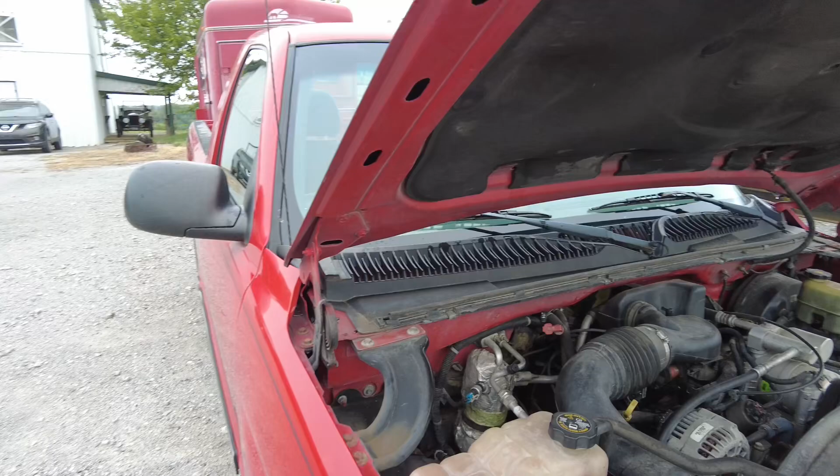So here's this pickup truck. It's got a V6 engine in it, and let's try to open it up. My dad broke it on the front. Yeah, I let him borrow my truck, and then he brought it back all beat up, but it was still working until now. So I have every reason to believe that either the coil or this ignition unit failed on it. I just changed the coil not too long ago, so we'll probably try to see if the ignition

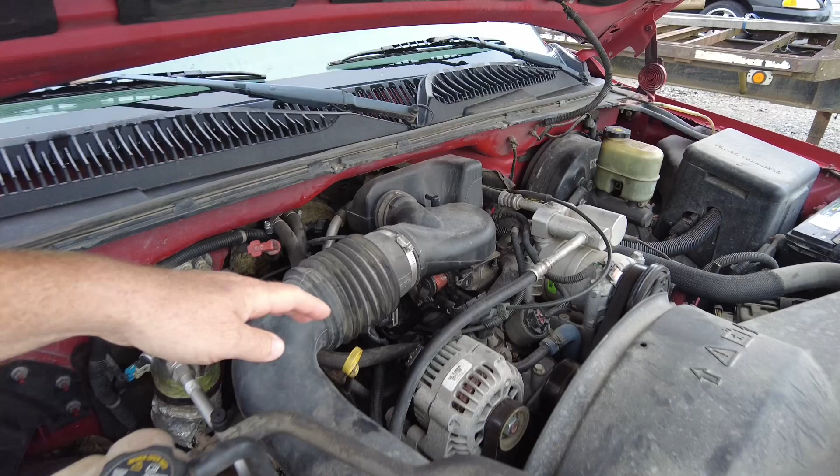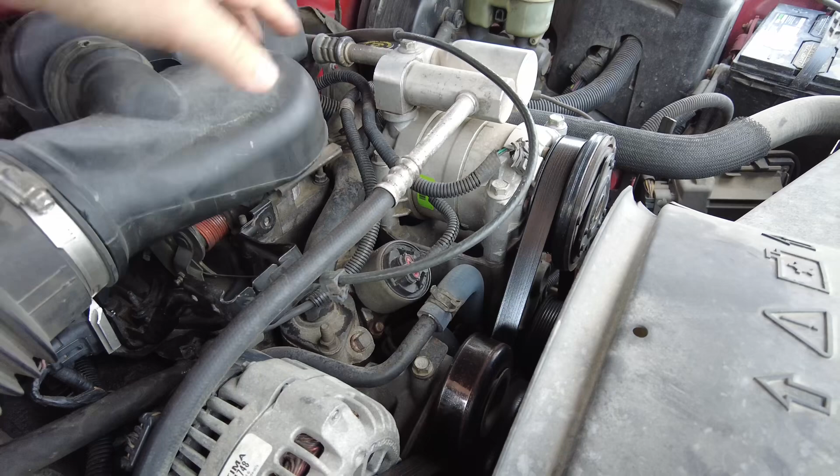part broke. So first we're gonna remove this big hose here. Actually I'm probably just gonna take this off and then remove that, and then we can get access to the ignition, which is right under here. Once you take this plastic screw off, there is a breather hose on the side that comes off, and then theoretically you can lift the whole thing up and move it away. The problem is it's still not good, so I think I need to remove this part as well. Well, it came right off. Remove this whole plastic piece, and now we've got access to the ignition part.

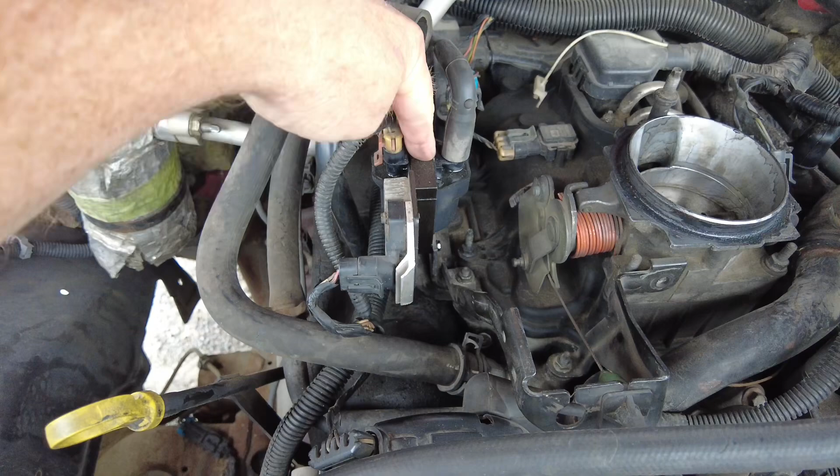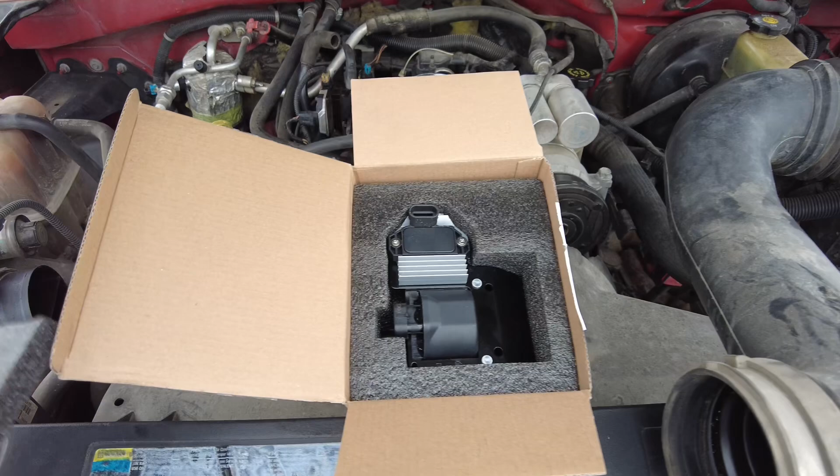So I just changed this coil, so I have a feeling that maybe this unit here broke. But I got the whole thing, so maybe just to test it, I'm gonna change this one first and see if it starts, and then we can eliminate the coil, and maybe I can save the coil. I don't know. I usually like to buy OEM parts, but this was $35. I couldn't say no to it, because just for this little ignition part at Napa they wanted $100. At O'Reilly's, they wanted $107.

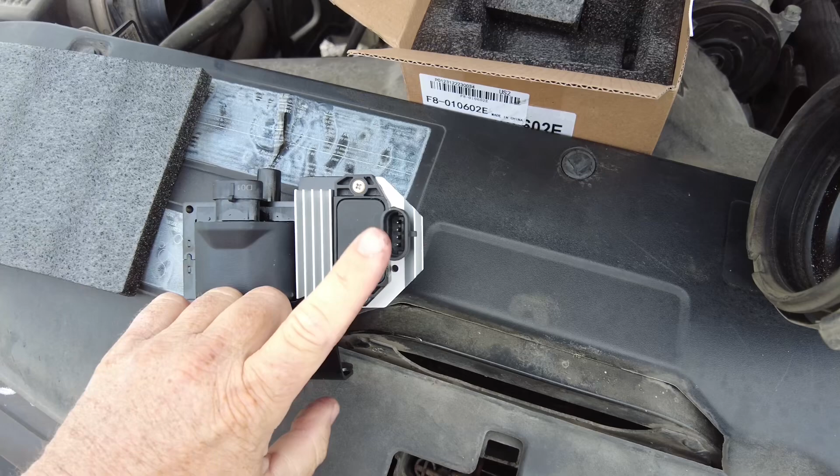So in this one everything is included. I'm just gonna try to plug this on first and see if the coil I have on it is still good, so I can save that coil for later. But this is how it looks, one unit. These guys are not connected, but they're doing something together, so they're kind of connected function-wise. I think I'm just gonna change the whole thing. So I'm gonna take this nut off and then the two bolts out, and then I can remove the whole thing. This is where the ignition goes out, and then I just need to remove these two cables, and then we can change the whole thing.

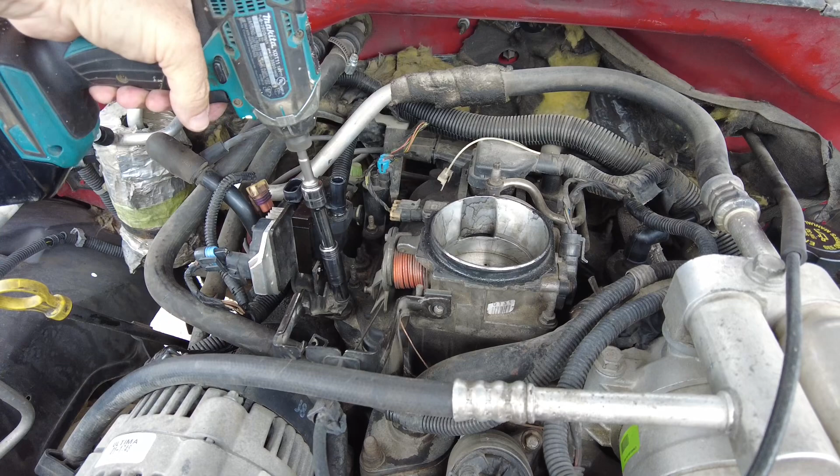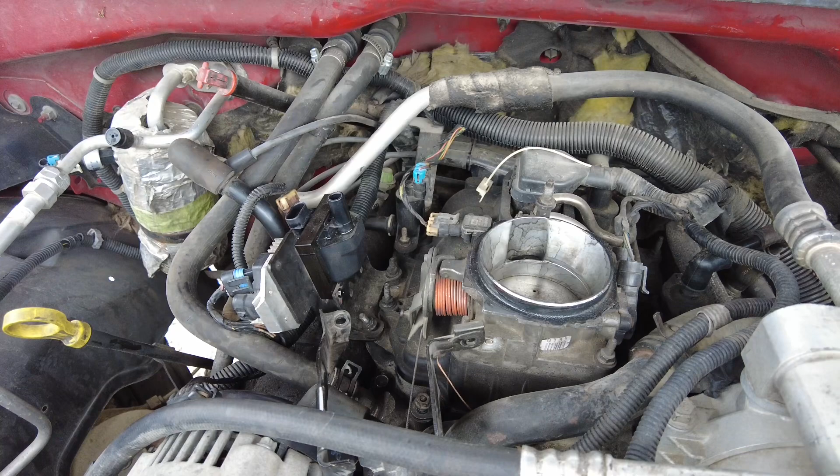First we remove this nut here, and there's another nut down there in the middle. These are 10mm nuts, so this car is all metric. So now we can take the two bolts out at the bottom, and the whole thing is out. So we can take these out, and the whole thing came off. Super easy. Next one goes on, and we can put the bolts back on the way they were.

That's pretty much it for the bolts. Everything is there. I know there's one broken in, but it doesn't really bother me. And then we just need to plug these up. 1, 2, 3, and then we can try to see if it works. If I start this truck right now, it most likely won't start, because the computer will not know how much air is passing through, since the airflow meter is not connected. So I need to reinstall this big hose first, and then try to start it. It's all back together, so let's see if it starts.

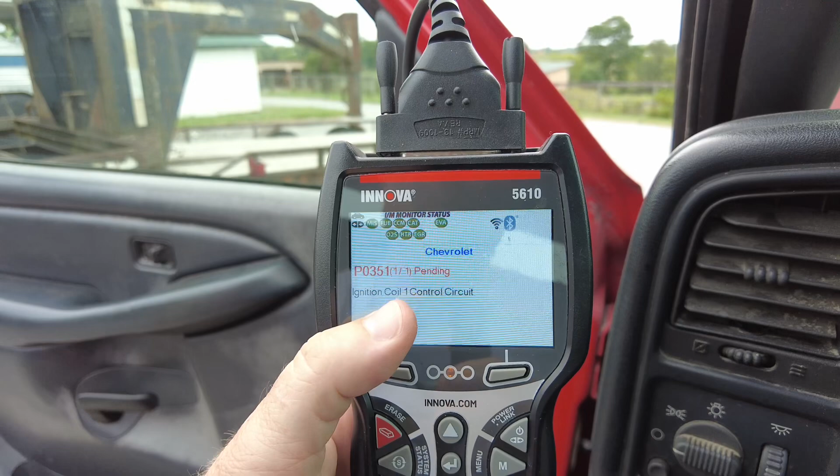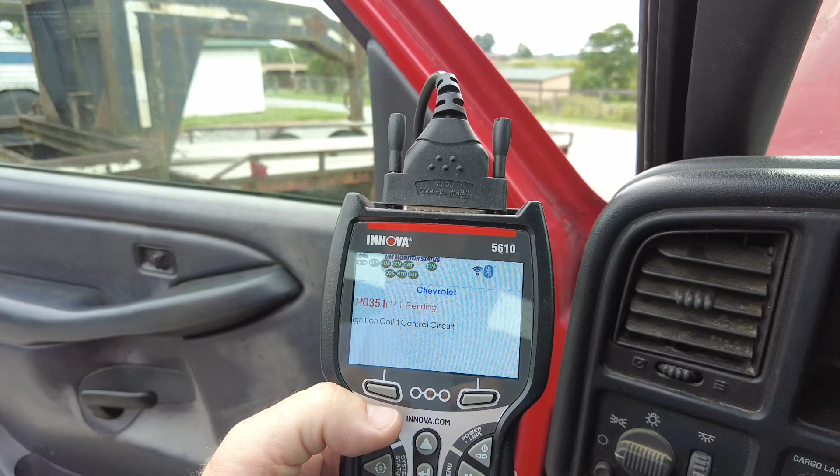Well, still no, most likely no ignition, so it didn't start or it didn't fix it. So I plugged in this scan tool. It says ignition coil 1 control circuit. So I was not totally wrong to do this, but I don't know why. So let's keep going with this. I've decided to reposition the truck here so I don't have to run that far to the garage, because it's going to be a deeper repair than I thought it would be.

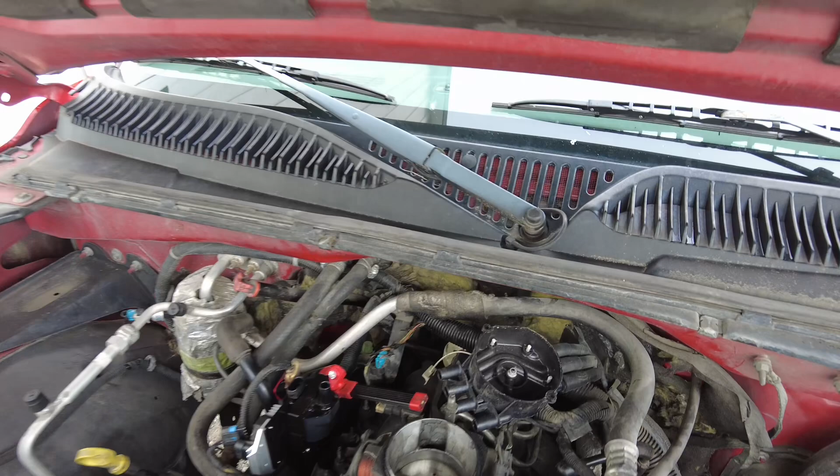So I pulled off the distributor cap, and it looks like there is all kind of rust in there on the connectors. So I'm gonna get a new cap and a new rotor, and meanwhile I looked at the voltage. 12 volts is supposed to be on this one where the pink wire, or used to be red wire, is. And then there's also supposed to be ground. The ground is present, and I checked that this also has 12 volts, and this other wire with a little bit of black in it comes over here, and they are connected. So these two things are connected together. So far so good.

So I have all the connections, all the voltage for this, but I have a feeling that maybe there is something wrong here. So I'm gonna change that, and then the next thing I'm gonna try is to see if the spark is coming out of here, and if it does, then that means there's something wrong over there. That's my thinking. So we just changed the rotor.

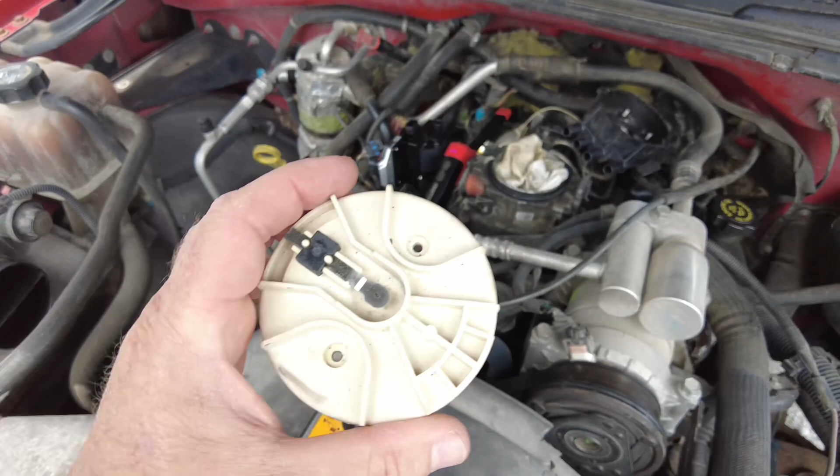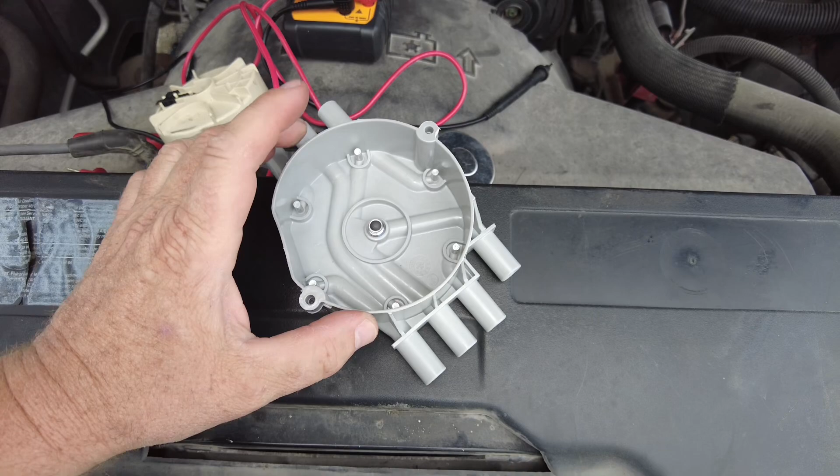The rotor doesn't look all that bad, but the bottom of the distributor is. So we got another one from O'Reilly's. You're not supposed to touch that carbon ball or the top of the rotor. This one is the old one. So now we're just gonna put this on and then see what happens.

Well, we put on the cap, and now we're installing the wires. Then we're gonna put all these things back on where they should go, and then we're gonna try to start it again, see what happens. Everything's put together. Let's see what happens.

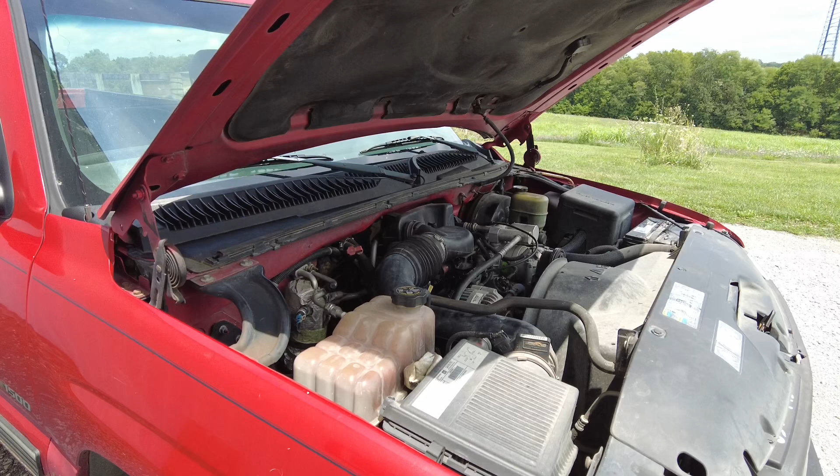Okay. Well, let's see, it don't work. Usually manufacturers give out a flow chart to troubleshoot problems like this. I think I checked everything. So basically on this one, you want to check the white wire when you crank it to have around 4 volts on it, and then the red should be positive all the time, and then the other one is supposed to go over to meet with the other wire, but none of these are working.

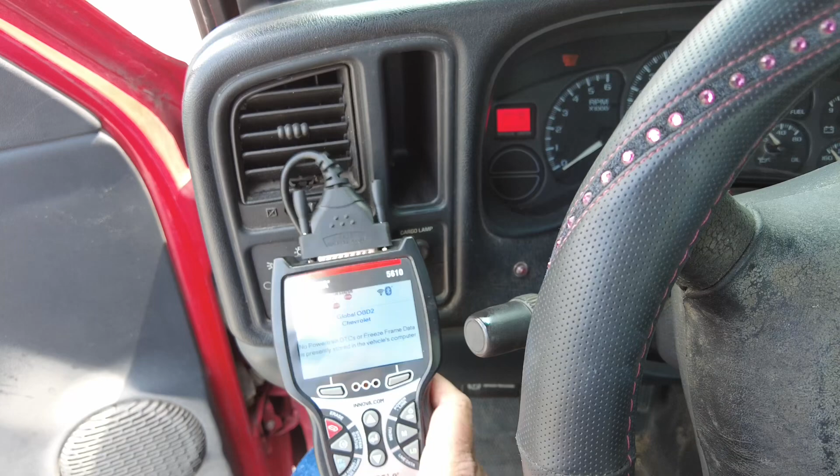So the only thing I came up with is that it's all good. It's just maybe the crankshaft position sensor doesn't give the information what is the RPM on the engine. So that's the next thing to check. So now we're gonna check if I can see it on my scan tool that when I crank the engine, does it actually show the RPM. So here's the engine RPM, and we're gonna see what it shows when I'm cranking.

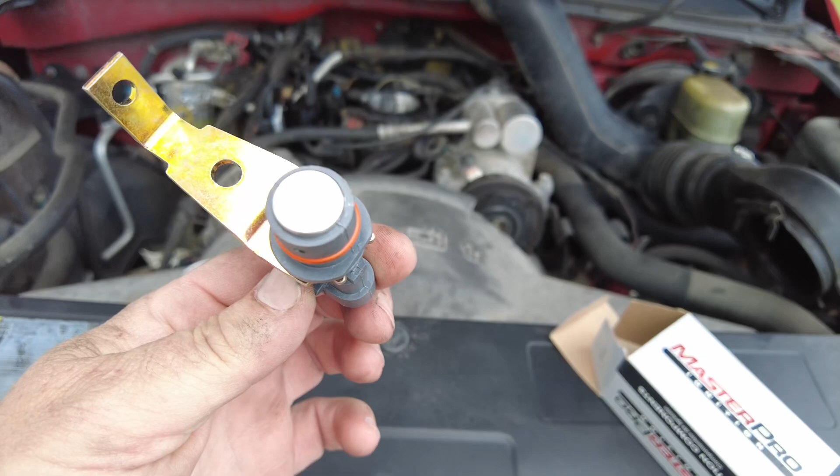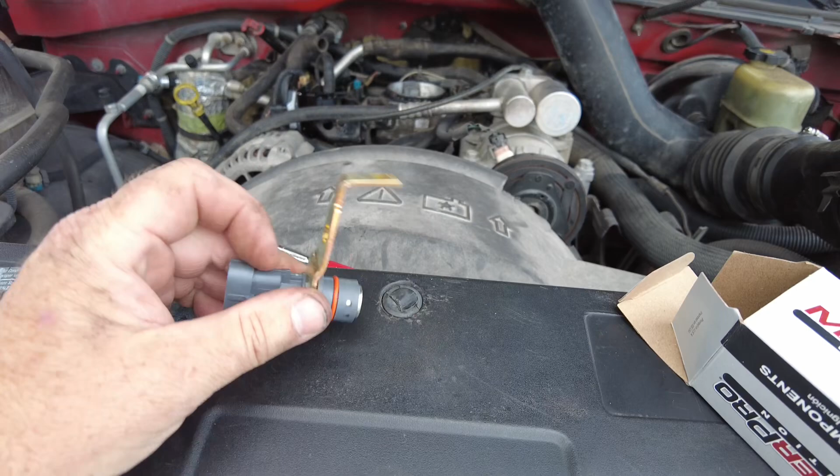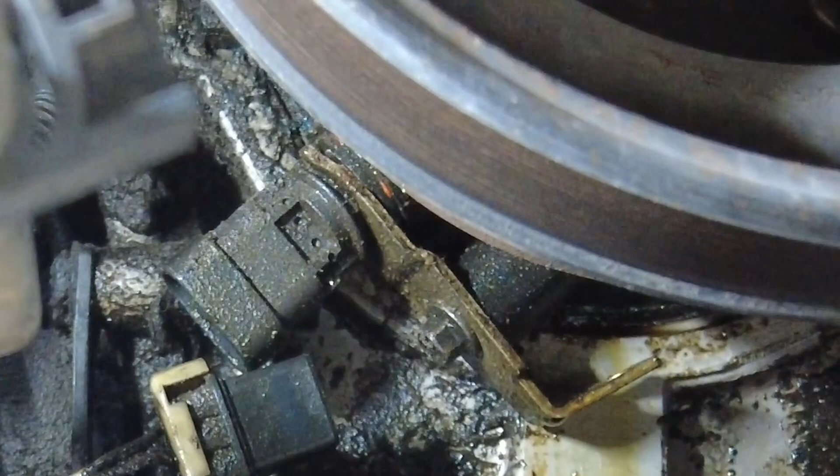It's at the very bottom on the front cover at the bottom of the engine, and just one nut brings it off, and then you can just pull it out. Yeah, this is very hard to show, but it's right there. You can see it over there. I pulled the cable off of it, so now I just need an 8mm wrench, and I can get that nut or bolt off.

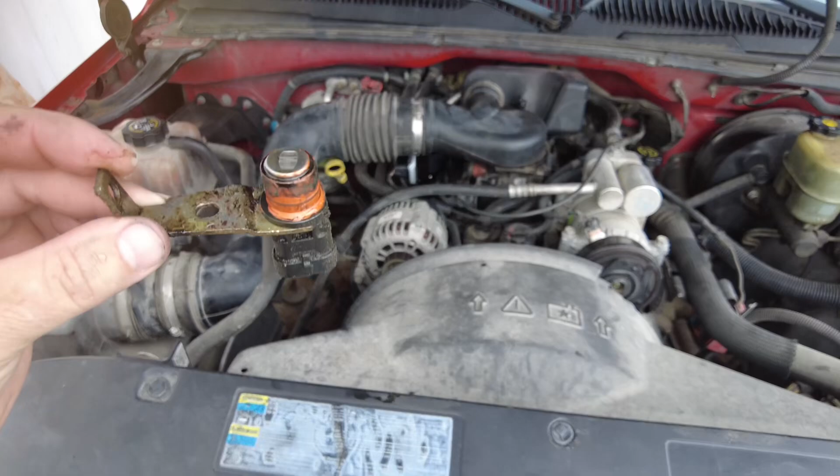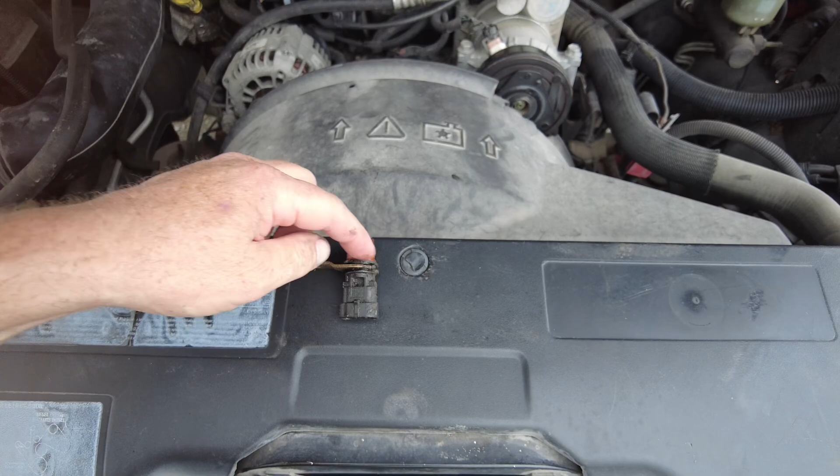Well, it wasn't easy. It's upside down. It's better if it's lifted up or it's on a lift. A lot easier, but I managed to do it. You can see that there is a little mark on it, so it's been hit several times, so maybe that's why it went bad. The new one came actually with spacers, so I put the spacers around it so it would pull it back just a hair. So let's hope that it's gonna work and fix the problem. So now we're gonna turn off the battery charger, and then let's try to start it.

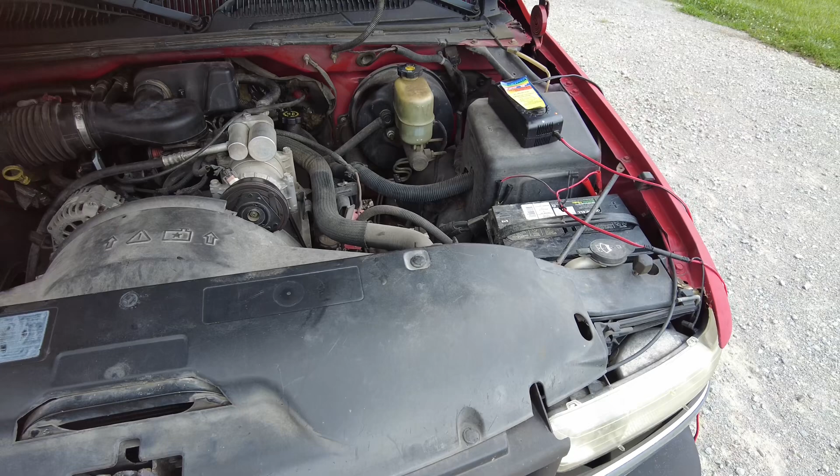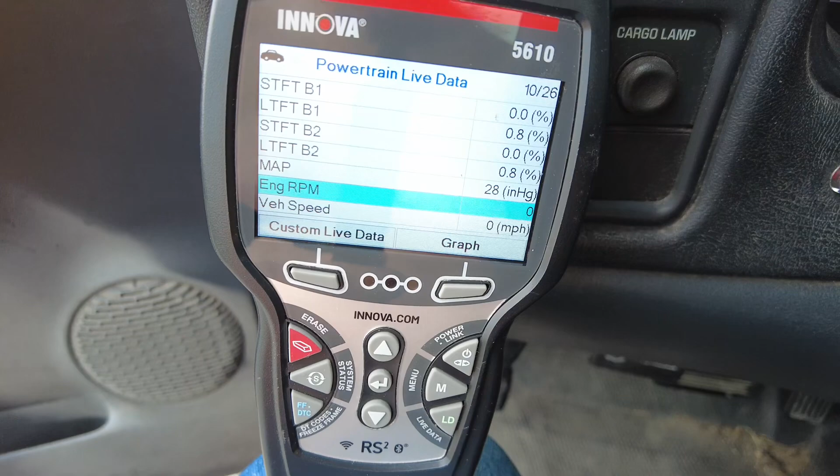Well, looks like it still doesn't want to do anything. Well, we're gonna plug in the scanning tool and see if it shows any RPM now. Well, still no engine RPM, so I got to go troubleshoot the plus and the minus, and then I got to see the data line.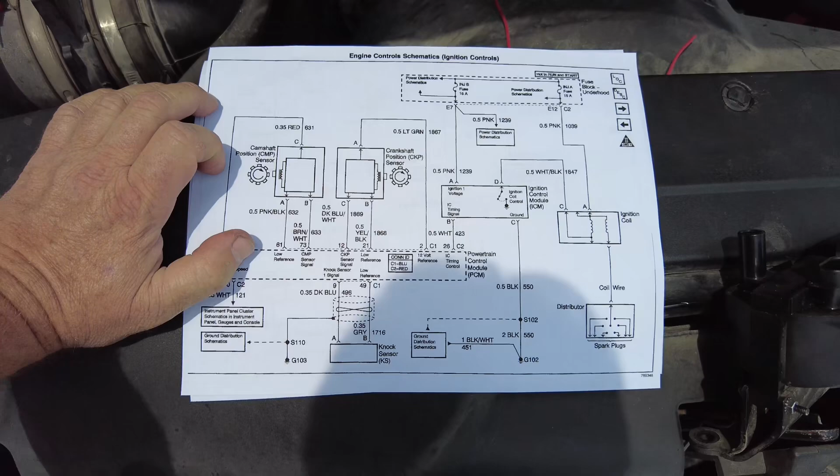A night passed by, so I kept thinking, what is going on with this thing? So finally I invited my buddy Mac over, and he has more than 400,000 miles under his belt with these engines. He had a Blazer and other cars which had the same engine. And then I was showing what I'd done to it and what I was measuring, and now I got this printed out little circuitry. So here's the ignition control module, and here's the ignition coil.

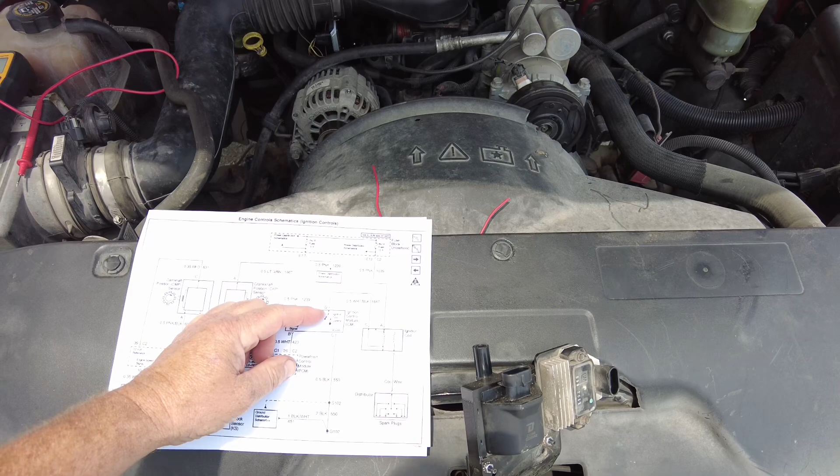So here's the ignition control module and the coil, and there's one wire that connects them together, the white and the black one. As you probably remember from earlier, I actually checked that at least 3 times, and every time I checked it there was continuity with this voltmeter. So if you put it to where it beeps and touch it together, it shows you that they're touching each other. So I'm showing it to my friend Mac, and it was not checking out. It was not beeping. There was a cut in it somewhere.

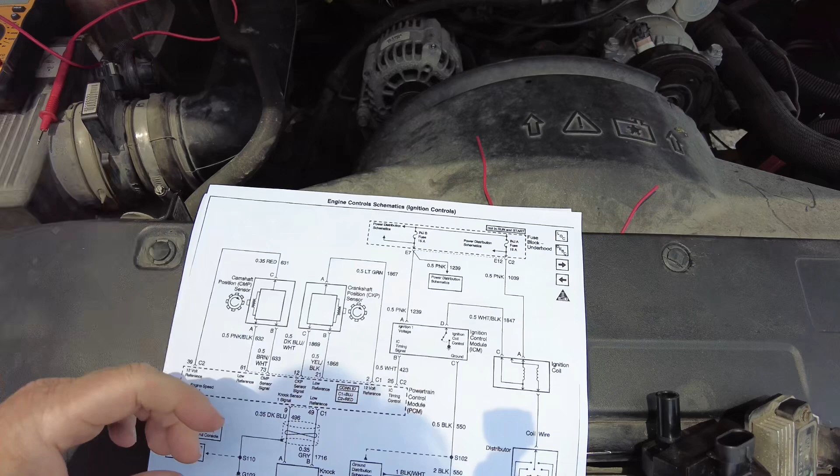So looking at it a little bit better, sure enough, very close to the coil, there was a little bit of a softness in the cable, and apparently the brass middle part that conducts the electricity separated and broke. So finally we figured out that it was a broken wire here. So I'm gonna take this intake off for the 27th time, and I'm gonna show you where it was. So here it is. I tried to use flow charts. I got some printed out flow charts, and I read the manual and all kinds of stuff to get to this point, and yeah, so this is it.

So now I have almost a new engine now. I got all kind of sensors and wires and stuff new in it, but at least it's gonna last for a while then, I hope. So now we're gonna just get the soldering gun out, and I'm gonna solder it up, seal it up, put everything back together, and we're gonna try to start it now.

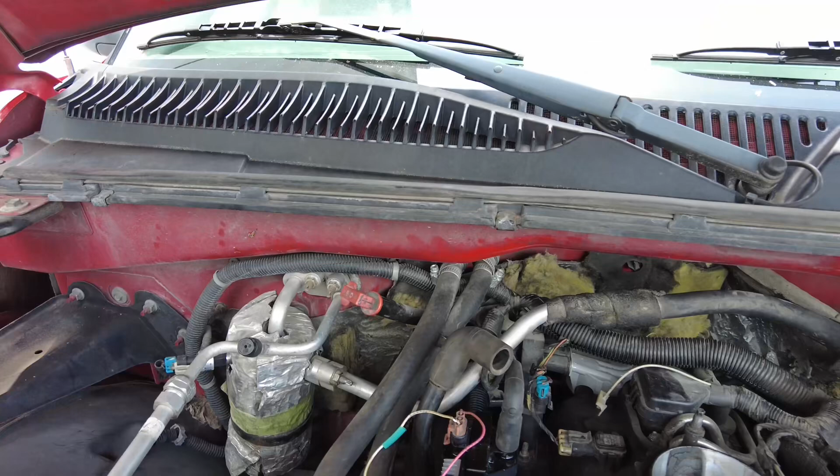Sometimes I do car repairs in my Greyhound bus or this, so I don't really like the soldering equipment that needs electricity. So I use this one. It's got a little gas in it, butane gas, and then it works really well, made by Weller.

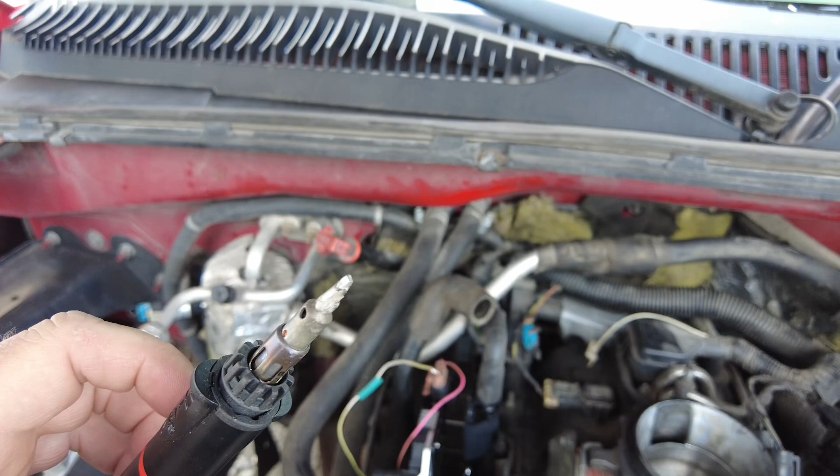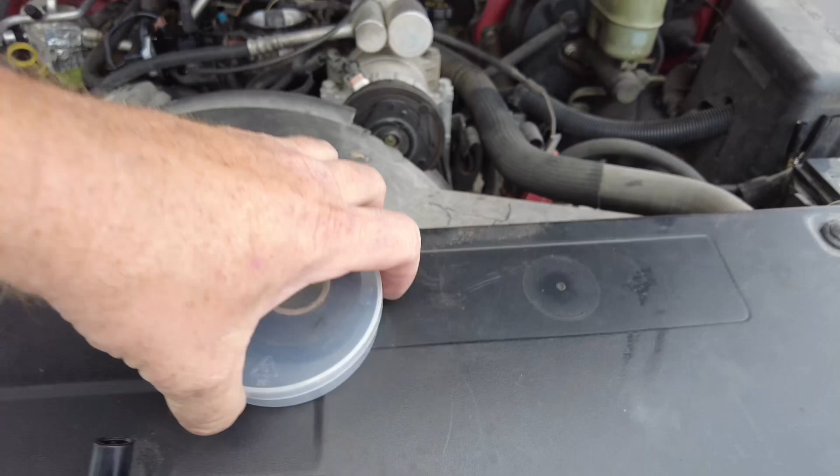And then I soldered it up, so I'm gonna put this little shrink wrap over it, and once the shrink wrap is done, then I'm gonna use some electrical tape and then cover it all up, so make sure it's not gonna move anymore. Hopefully that will fix it. I like to keep my electrical tape in this little holder so it wouldn't get all dirty.

So I finished off wrapping up both cables, and then there was a factory protector on it which I put back, and then put a little electrical tape on the end, both ends, and then a little bit in the middle. So now supposedly it's all good, so let's put this air duct on it the 27th time, and then let's see if it starts.

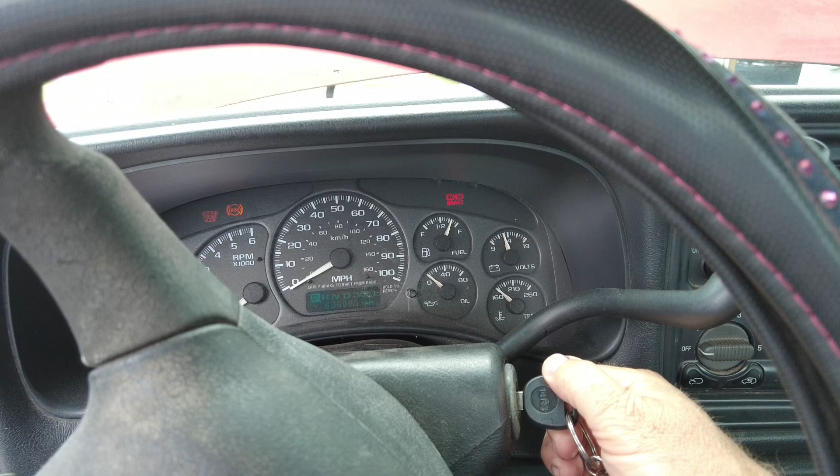Most likely everything is back on. If you work on one of these, don't forget that there is a little breather hose in the back. It needs to go back on also, and let's see what happens. Woohoo! Fantastic, running like a champ.

As you see, there is a check engine light on it, so we're gonna have to take care of that in a second, and then everything else works. There is a little hissing sound in it. I'm sure it's not a snake. What is it? And sure enough, this thing. And I just changed the damn thing. So, yep, there we go. So I just need to change that. I need to change this before we can go any further.

Now the engine already developed a little roughness. So I'm gonna have to find some hose, and I just have to change that out. I found 2 hoses, so temporarily I'm gonna do that. I think it's gonna work, and then I'm gonna have to just buy the proper setup. I think I'm gonna look around on eBay. Maybe I can find an original one and replace that.

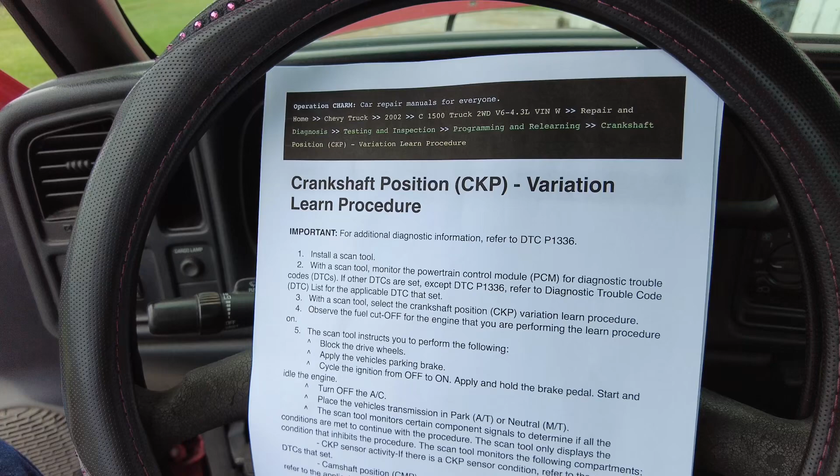So now we're gonna teach the car where the crankshaft position sensor is, but I'm waiting for it to warm up a little bit, and then we're gonna try it, because we're gonna have to rev it up pretty badly. Okay, so here's the crankshaft position variation learn procedure. So first we're gonna install the scan tool. So scan tool goes on.

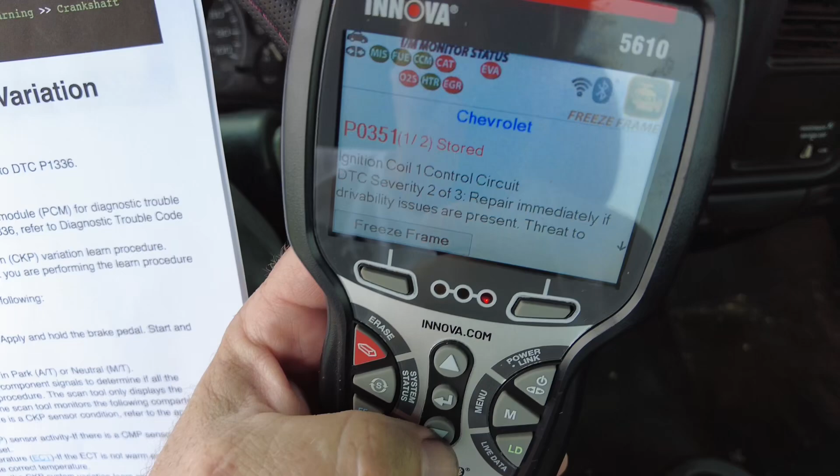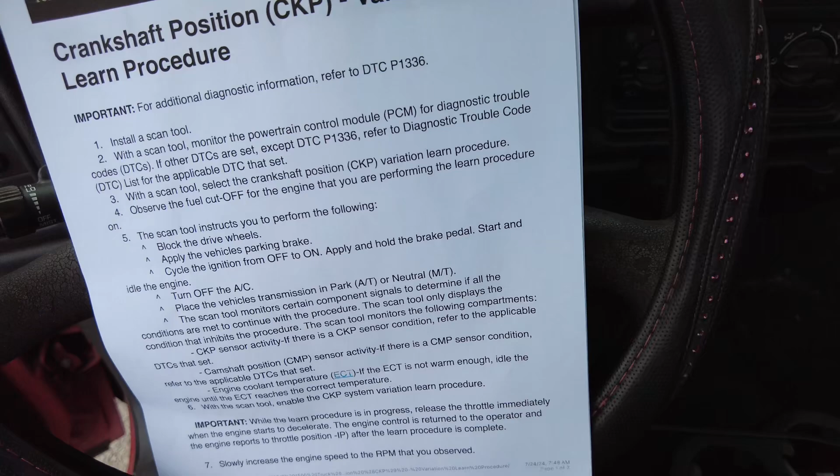So this is what we're gonna do. It says crankshaft position variation learn procedure. It says if you have a code of 1336, which we don't have, we have this one, and that was the ignition coil. So we're gonna erase that. Yeah, erase DTC. So this was successful, and then we're gonna go back and go to the diagnostic trouble mode, and then all these things.

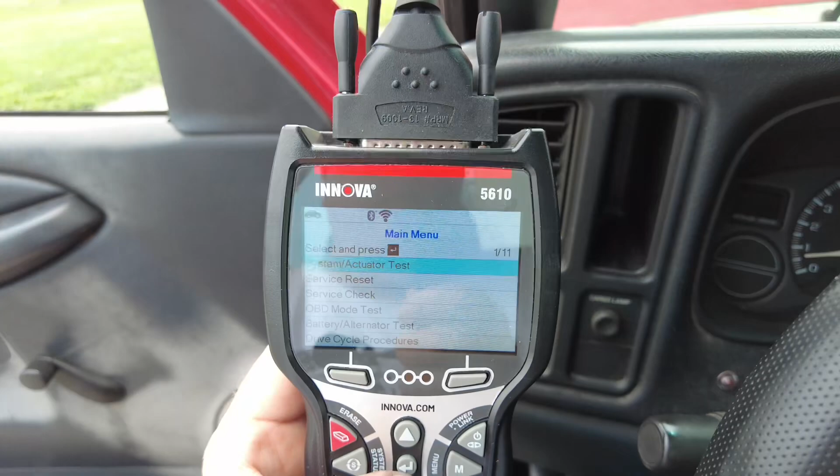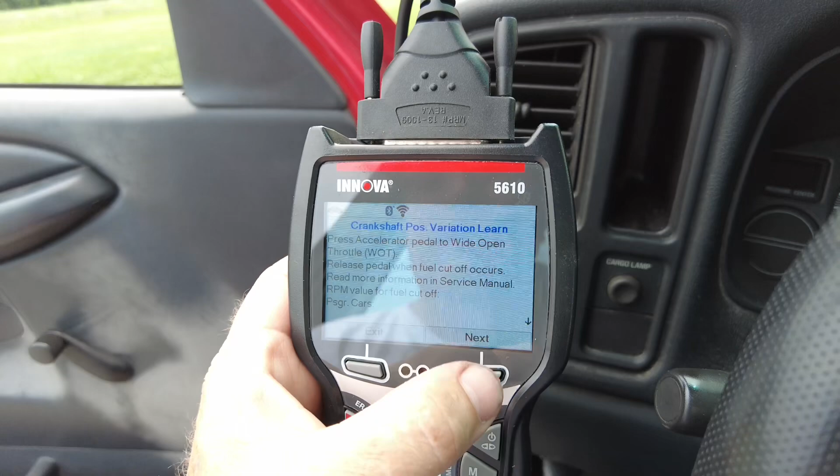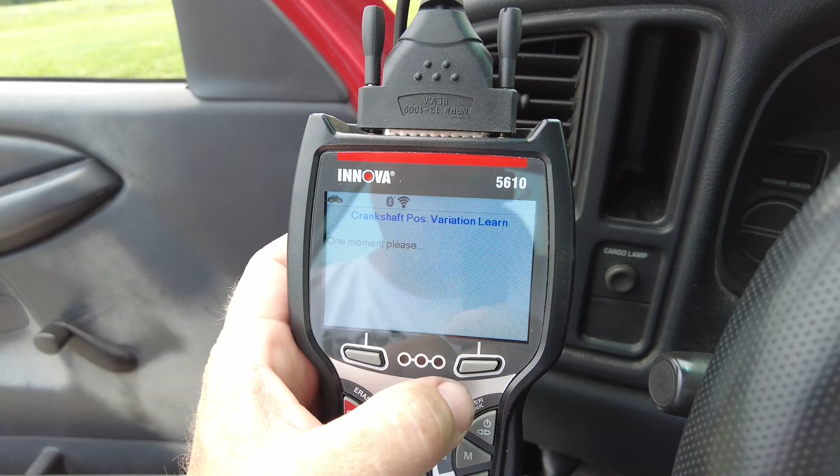So we basically go to the teaching mode. So we're going into the system actuator test. Crankshaft position variation learn, and then it says all these things. Next. RPM should not increase beyond the calibrated value. Yes. Next. Please make sure following conditions. Yes. Next. And it says auto, and there says engine speed, shift gear in neutral. Okay, next.

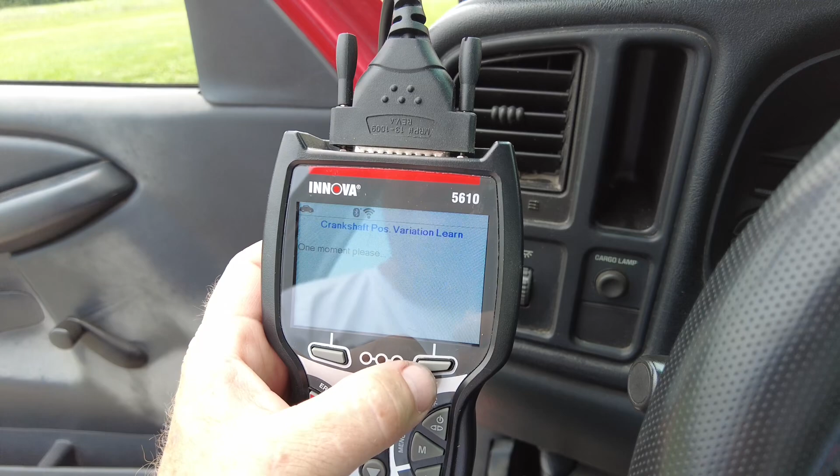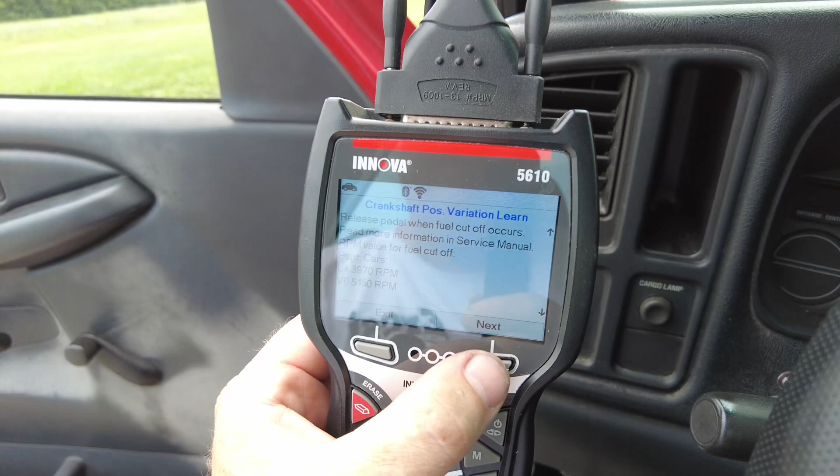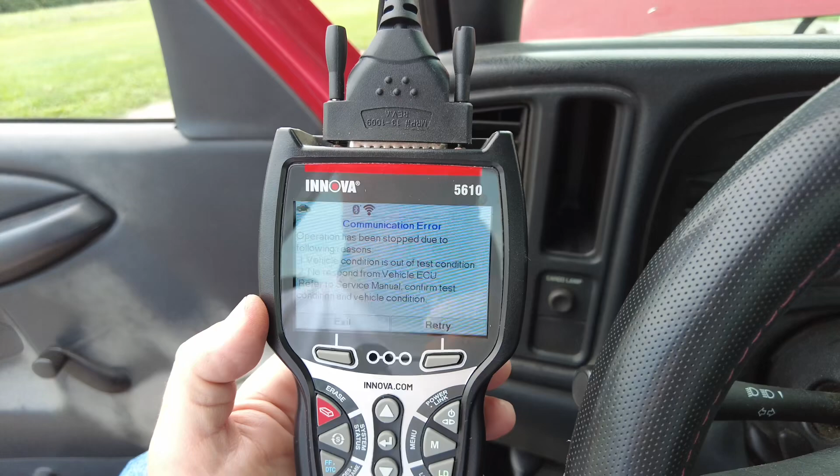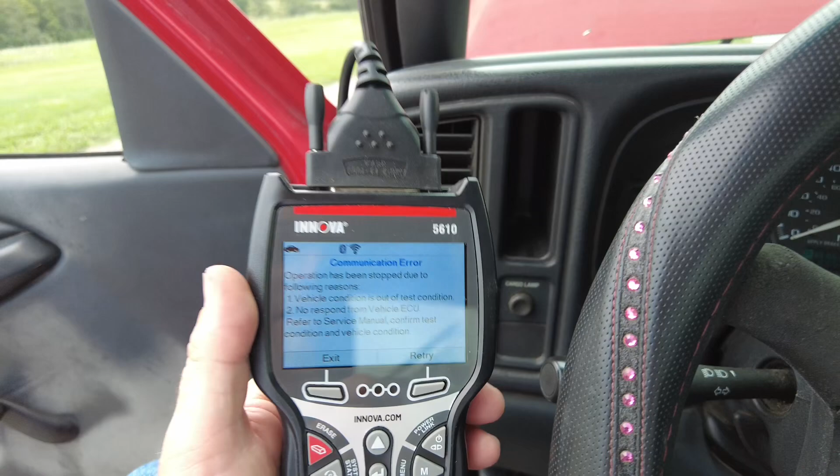So it says I have to release the throttle at 5100 when the fuel cutoff occurs. And then next, release pedal. Well, I tried everything. I got this message, I don't know why. It says vehicle condition is out of test condition, no response from vehicle ECU. I set the parking brake, holding the brake pedal, then it's warmed up, so it's showing 190 Fahrenheit, so everything should be there, but it's not happening. So I just got to forfeit and give up. It's a trash truck, so I don't care.

Now that this Chevy is running, we can get back to the repair job of the cargo van. It's waiting for some parts. I already got them, I just need time to put them back on. So yeah, there's gonna be a video of the cargo van repair as well.

As you guys probably figured out by now, I'm not a professional car mechanic. I'm just having fun fixing my own stuff. So you better consult your owner's manual or shop manual, or take your car to a mechanic, and they're gonna fix it for you the right way, and they're not gonna make you spend all kind of money on it like I just did. It was just a wire, but I bought all kind of parts for it. Well, anyhow, it ended up being a lot longer video than I planned. So the car is running, good deal.